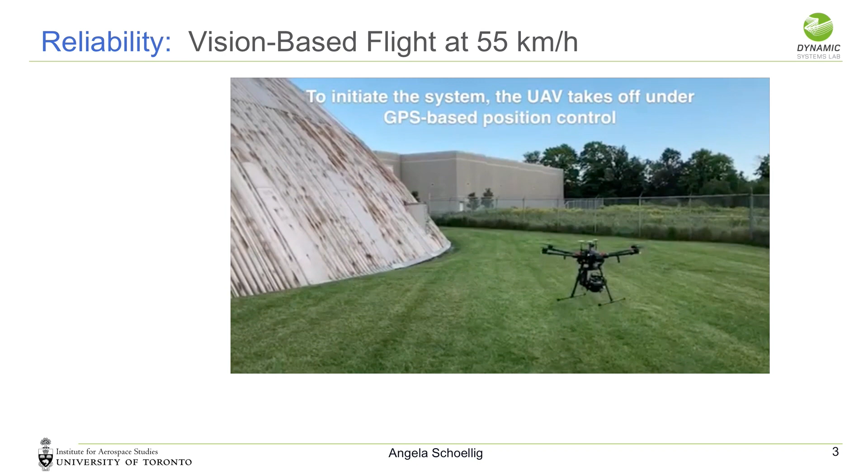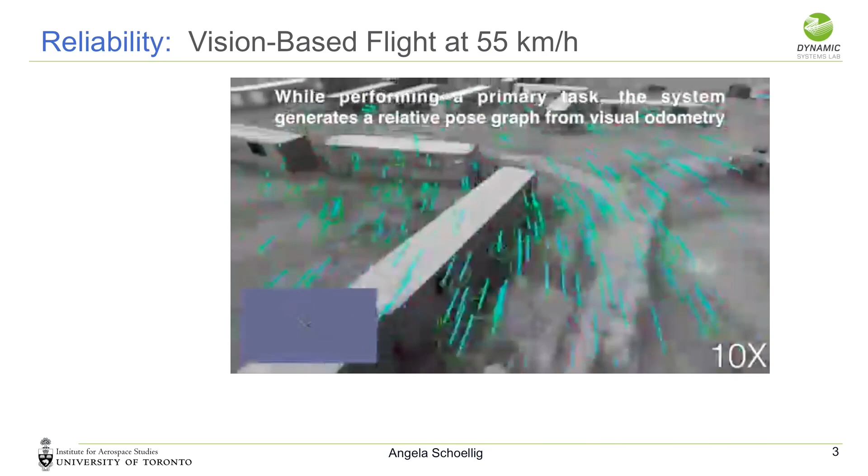We also care about reliability. This is a recent project where we use stereo vision as a backup for GPS. So we fly based on GPS, but when we lose GPS, we could use the images that the vehicle captured during flight to safely fly back based on vision alone. Here we fly up to 55 kilometers per hour, and we did tests even in downtown Montreal earlier in the summer.

So reliability is important in robotics. The same for safety. Here you see an off-road vehicle that we drive at our location. We do right now a long-term experiment where the robot needs to drive this route as fast as possible, in every season. In Toronto, as you can imagine, it's the same as here, we have lots of weather changes.

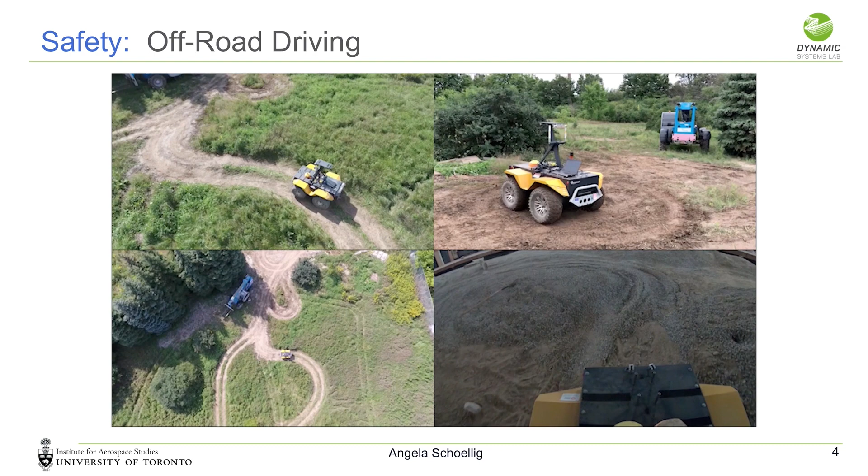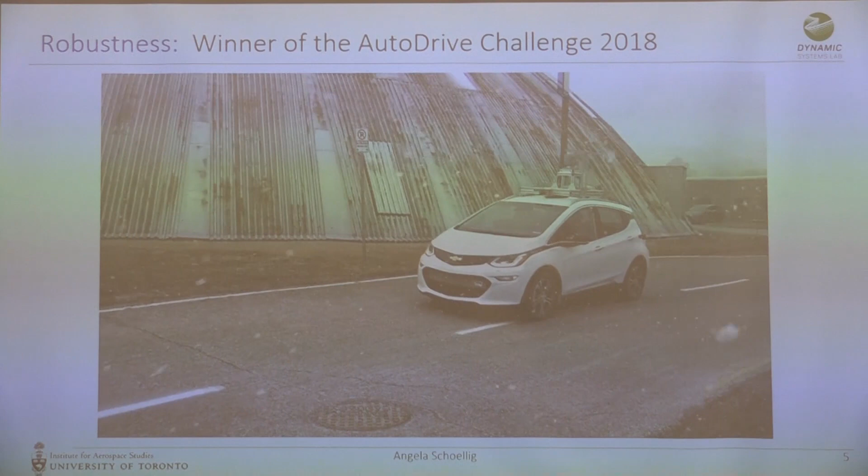We recently started a self-driving undergraduate team that competes in the General Motors AutoDrive challenge. It's over 3 years, inspired by some of the DARPA challenges. We had only 6 months to build the first prototype of this car, and we tested in winter conditions in Toronto, but the competition was in the desert in Arizona. So robustness, practical robustness is important, systems working in various conditions.

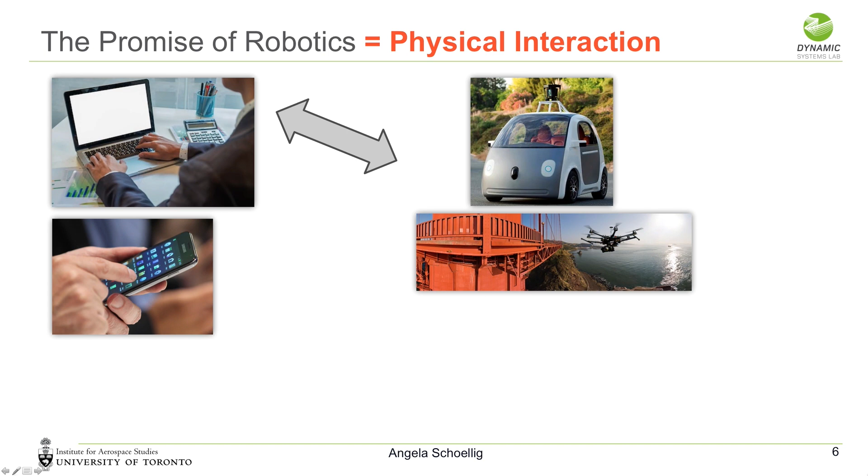That's kind of the setup of the lab. If you come to the lab, you could actually see those systems running. What is really interesting in robotics, compared to computers and smartphones that have clearly disrupted our work and personal life, is that robots promise physical interaction, and that can mean moving people and moving sensors in three-dimensional space, but it could also mean real physical interaction with a human during work tasks or helping humans in their daily tasks.

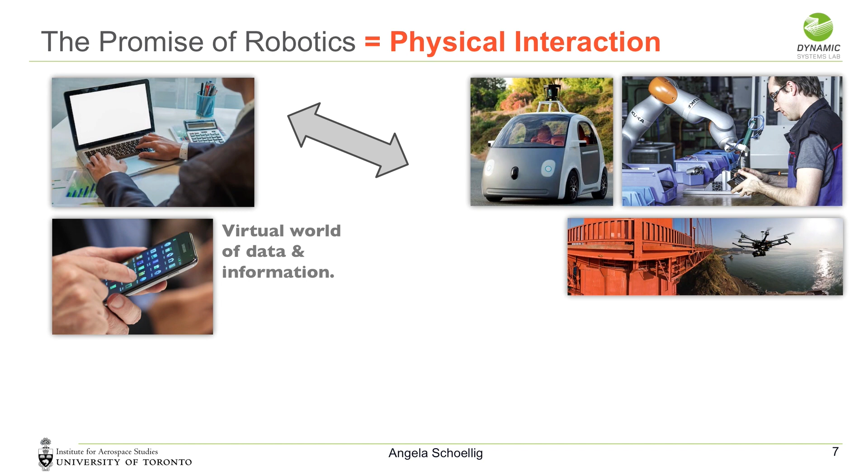But while computers and smartphones really operate in the virtual world of data and information, robots interact with the real world, and that makes the whole problem so much more difficult. It's really an exponentially increasing complexity.

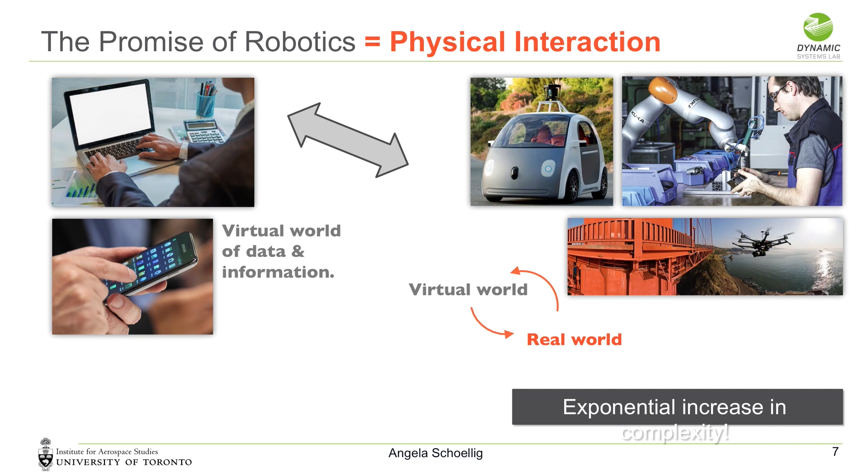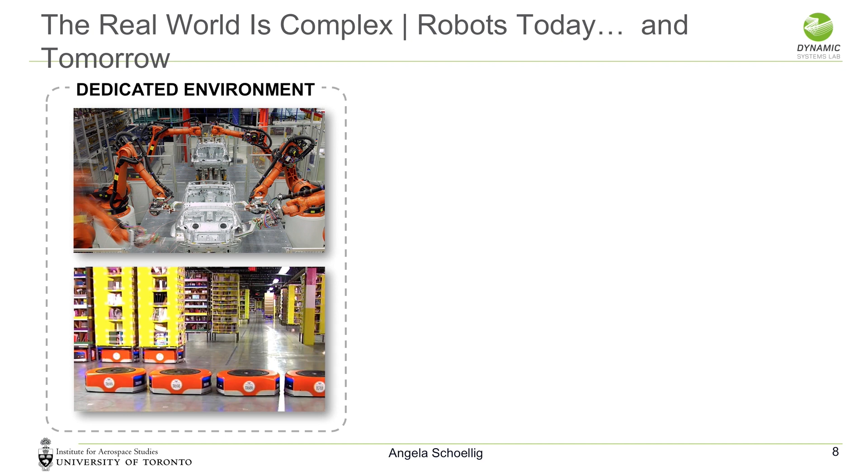How we have dealt with this in the past is that we built dedicated environments for robots where we reduced the complexity and where we could generate models that reflect the real world. However, the applications that I showed you that we aim to build as roboticists are aimed to work in human-centered environments where we have lots of prior uncertainty that is hard to model and describe.

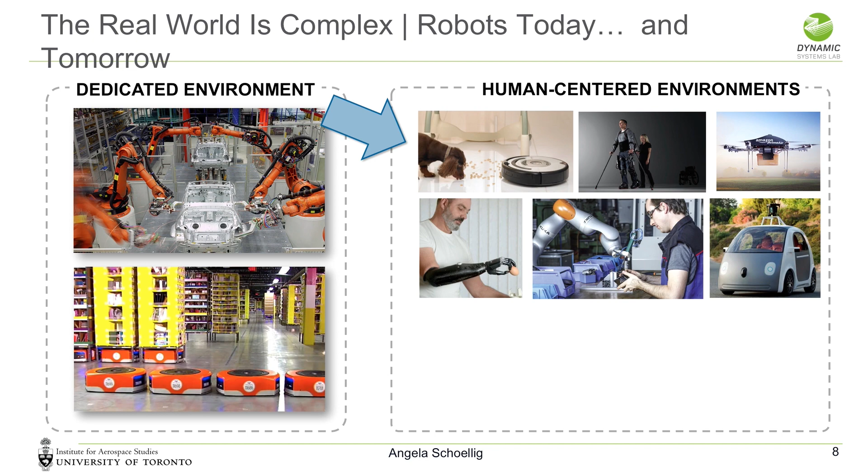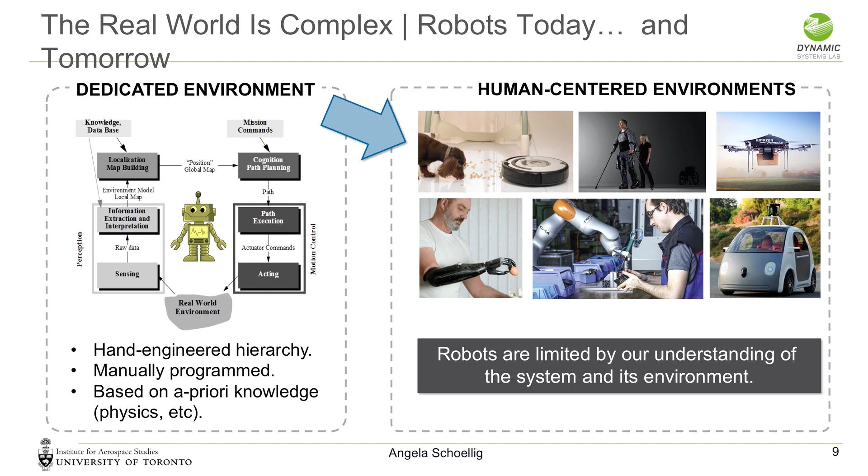So while in a dedicated environment, we can build these nice building blocks from perception to action, hand-engineered hierarchy, manually program the robot, and use a priori knowledge that's sufficiently correct to make the robot work and do the tasks, in human-centered environments, our understanding is limited, and that limits the performance of the robot.

To give you a fundamental question that describes this problem: how do we design robot algorithms that achieve safe, reliable, high-performance robot behavior in a priori unknown, unpredictable, and changing conditions?

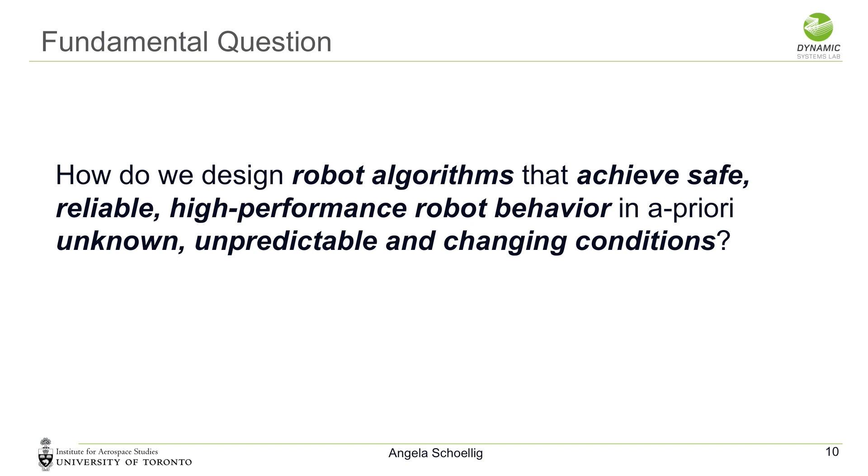One situation we encountered in Toronto: if we do off-road driving over a longer period of time, a robot experiences all these different road conditions. From light snow in January to freezing rain, then it got a little warmer, and we have sunny temperatures all the way to when the vegetation grows in May. That's a range of different conditions, which is challenging both for the vision side, but also for the control.

To make a robot operate in all these different conditions, one way to do that is called robust algorithms—designing an algorithm that works for all of these conditions. But as you can imagine, with the robot applications we have in mind, the range of conditions the robot has to work in is so large that robust algorithms ultimately turn into very conservative algorithms.

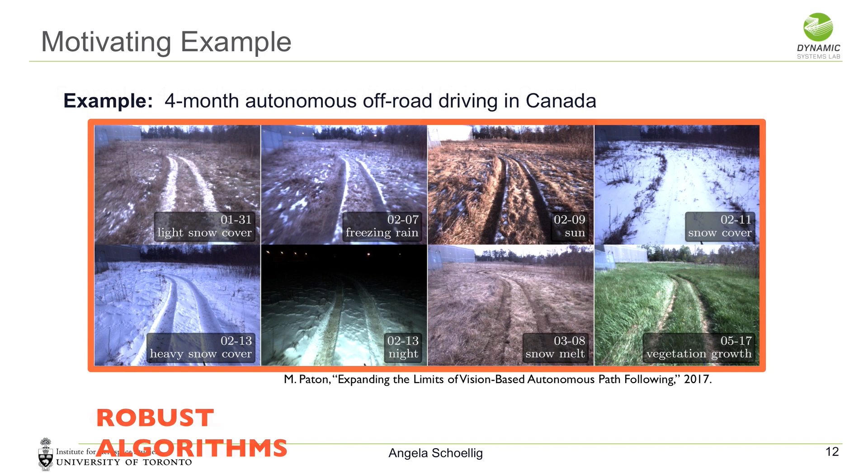So probably this robot would drive extremely slowly, because that's what it needs to do when we have heavy snow or ice. But in summer we could drive much better, in dry and sunny conditions. So a robust algorithm is never optimal for a single condition, and that's also called the robustness-performance trade-off.

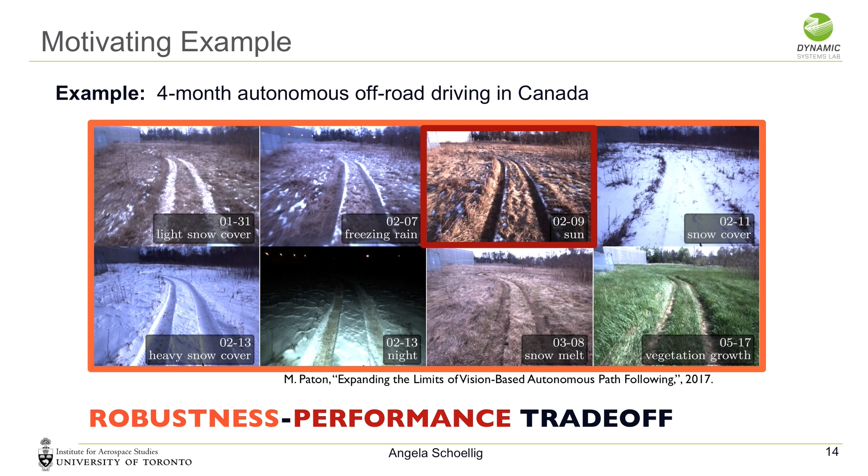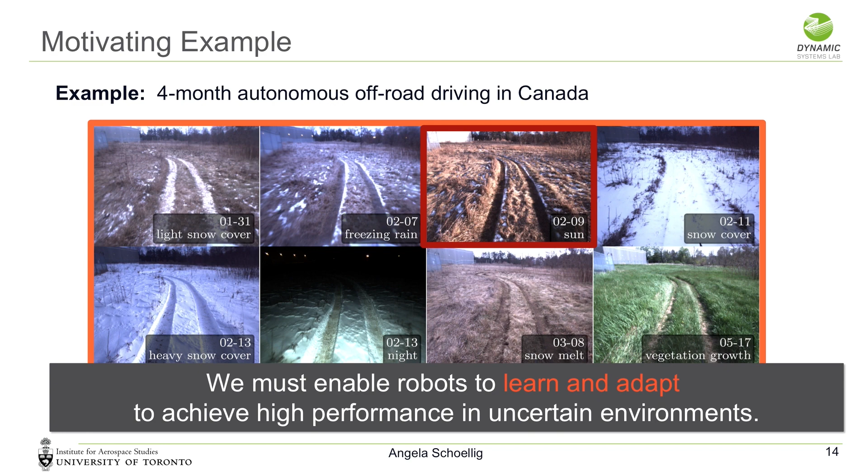To deal with that in practical applications, our belief is that we need to enable robots to learn and adapt to achieve high performance in those uncertain conditions.

So if you compare machine learning with robot learning—which is something I want to motivate—in general machine learning we look at feed-forward pipelines, versus in robotics we have dynamic systems and feedback loops. We have sensors that measure the environment, and then based on the actual sensor reading, we act.

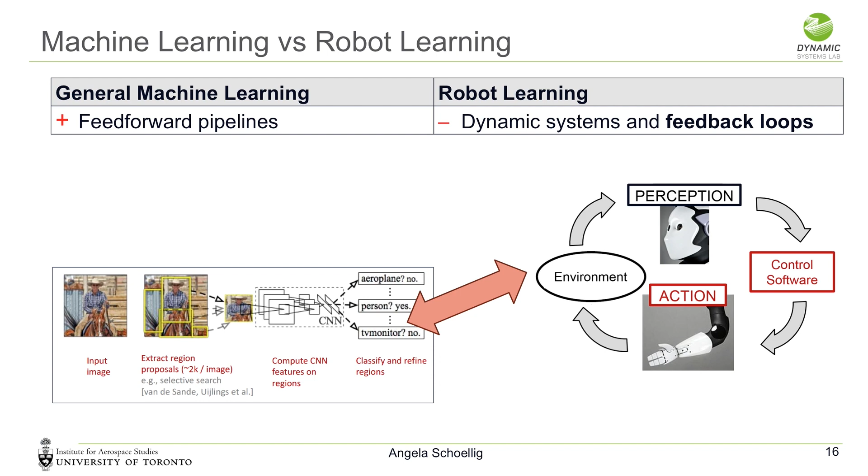The systems we look at in robotics perceive the environment, then decide what action to take next, and this action again influences what it sees in the next time step. So as actions influence the perception and vice versa, it is very difficult to have a complete data set a priori for these systems. That's very different from some of the standard machine learning problems like object detection.

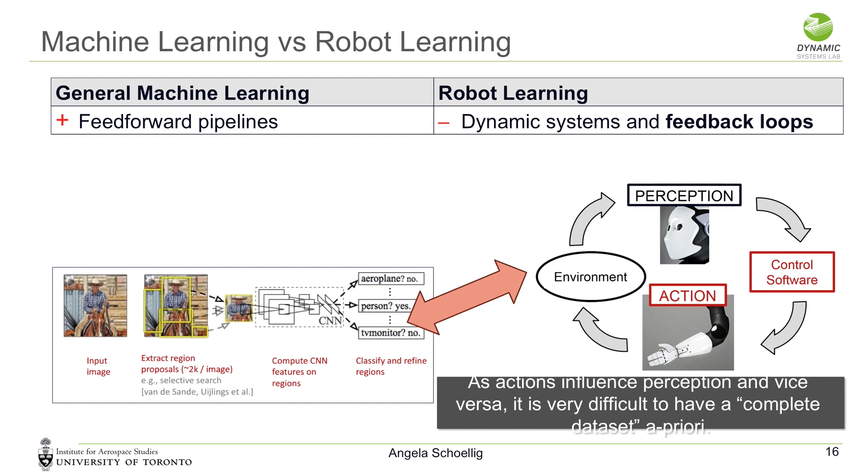But also even speech-to-text algorithms and things like that.

On the other hand, general machine learning is not safety critical. If I don't detect the right object in an image, that is not necessarily a big problem. If my phone doesn't understand me when I talk to it, I just try again—it's usually not safety critical.

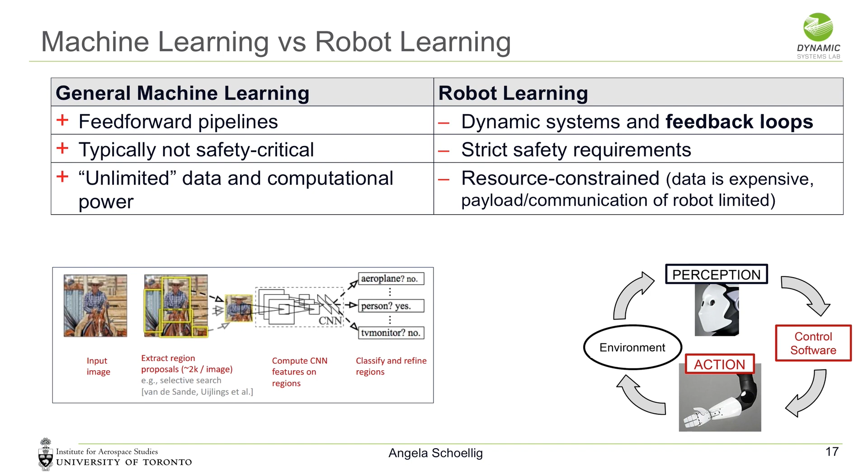But a robot doing the wrong actions could harm the environment and destroy the robot. On the other hand, we usually have unlimited data and computational power for these standard machine learning problems, but robots are resource constrained, and every time a robot moves in the real world, that costs money. It's expensive, and the payload and communication of the robot is limited.

But there are some other interesting features in robotics that make the problem interesting. We can influence the learning—we can do things like active learning. We can, on purpose, move the robot to a certain location to gather data. And we know something about the physical world: there are physics laws that we believe are correct, and we should be able to incorporate them into those algorithms.

And often there's more limited understanding of the underlying principles of some of the traditional problems that are solved with machine learning.

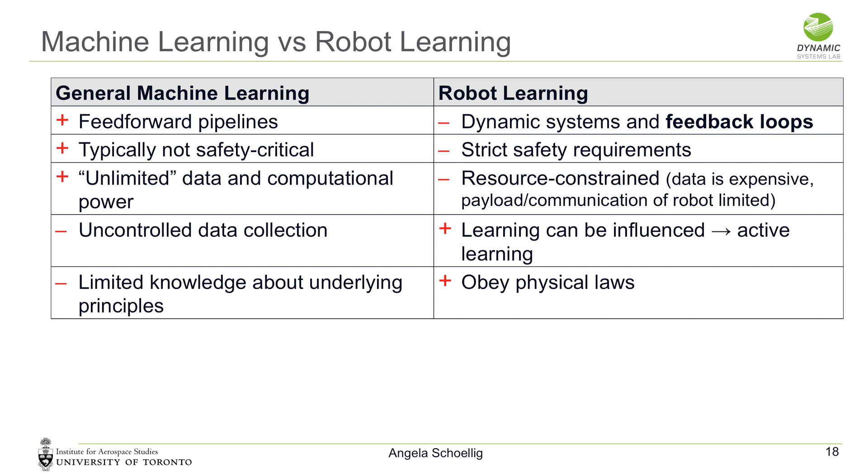So looking at all this together, there has been a lot of progress in robot learning. It's clear that people have shown that robots are able to learn new skills from experience.

The learning components are placed in the closed loop, which means the perception module is used to decide what the next action is, and this is done in the closed loop. But safety is usually ensured through an external safety backup system.

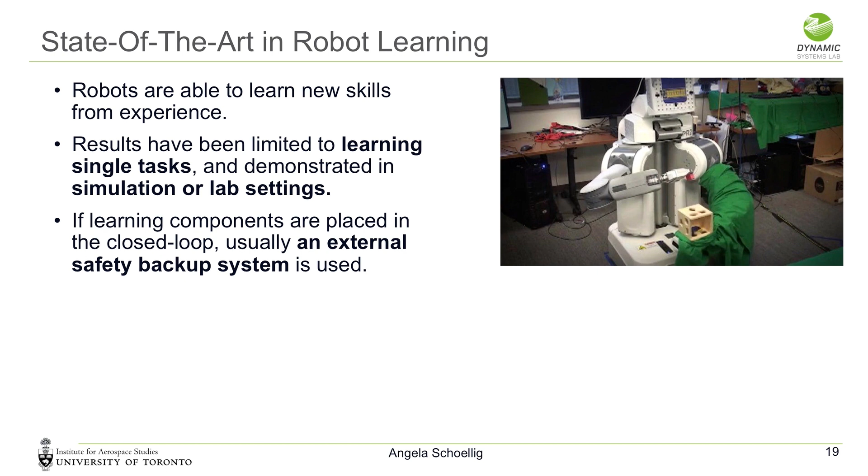A lot of the robot learning tasks that have been shown to be successful are in manipulation or using robot arms, where external safety mechanisms ensure the robot doesn't harm itself or the environment. The open question is how do we enable robot learning in realistic application scenarios outside of the lab? For that, we need data-efficient algorithms, something I call online learning algorithms. The robot needs to learn as it moves in the real world, because we assume we don't know the effects ahead of time that it is supposed to learn.

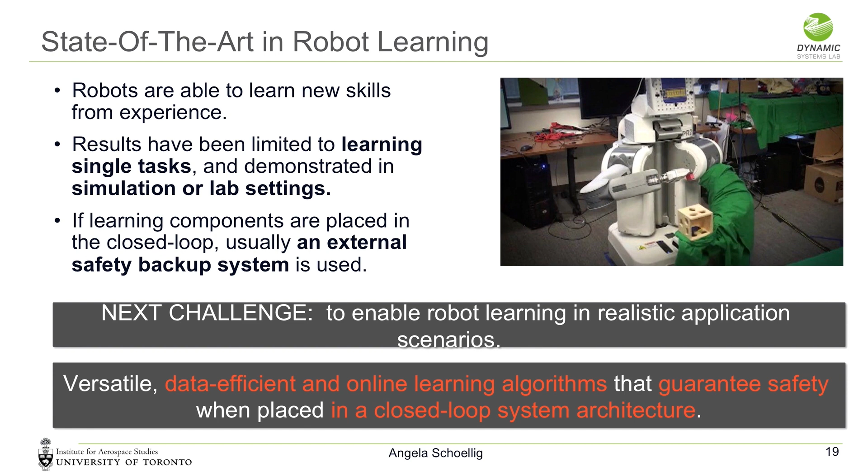For that, we need to guarantee safety. All of this means that as the robot moves in the real world, it's learning in a closed-loop system architecture, so it needs to perceive and then act, perceive and act. This closed-loop architecture could cause systems to be unstable or fail if not designed properly. So really the question is, how do we bring robot learning to applications and out of the lab setting?

Our approach in my lab has been to look at the combination of machine learning and control theory. That's the traditional approach to make machines do tasks on their own. For me, control theory is the science of feedback—it's the theory that describes feedback systems, where I have a perception-action loop that continuously runs on a system. Control theory has defined really important properties of feedback systems.

For example, stability, performance, and robustness. These concepts are defined in control theory and are extremely important for any machine operating in the real world.

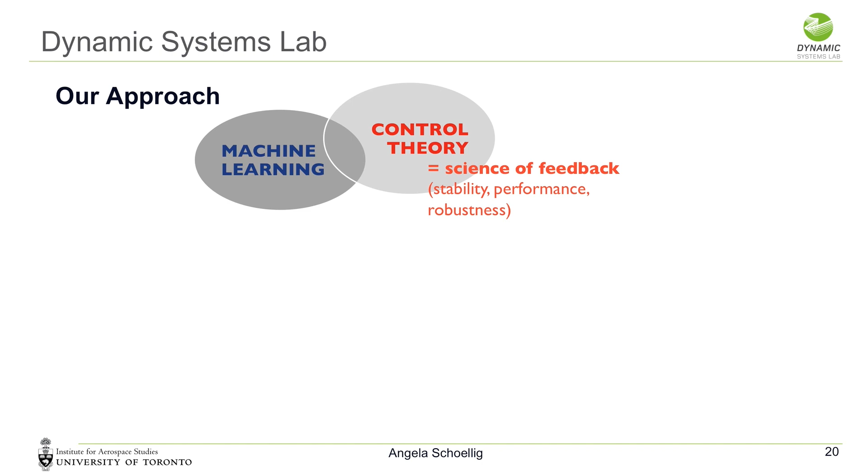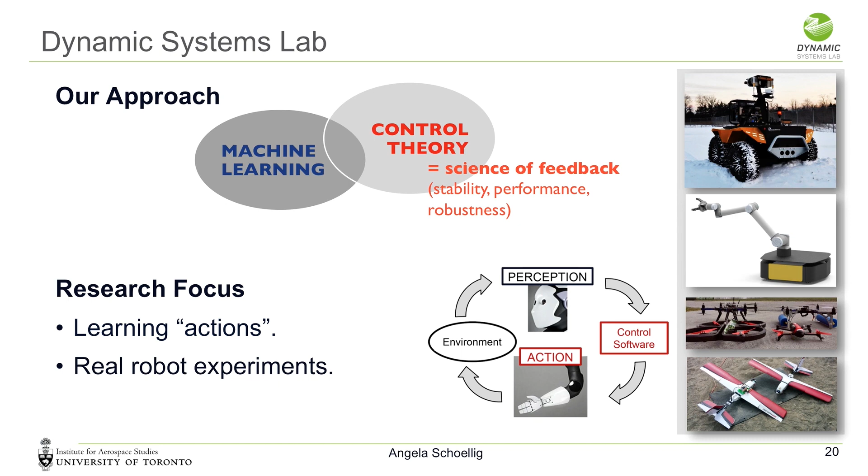So yeah, we have these action-perception loops. In my group, we focus right now mostly on learning the right actions, assuming the robot has perceived its environment and has a good understanding of its own state and the state of the environment—what are the next actions to take? We test on real robots, as I showed in the first videos. So let's see what we have been working on.

I structured the approaches that we have been doing in three parts: approaches where we leverage architecture and hierarchy, some work on safe learning, and then some more recent work on the combination of really fast adaptation and long-term learning.

We decide what actions to take over the next n time steps to achieve my task, and then we resolve this optimization problem. We know where the robot is at the start, we have a rough idea what the system dynamics are, and state and input constraints can be properly incorporated. This is a typical model predictive control framework—you can think of it as a general framework of feedback control. If all of this is known, this is model predictive control and it works really well.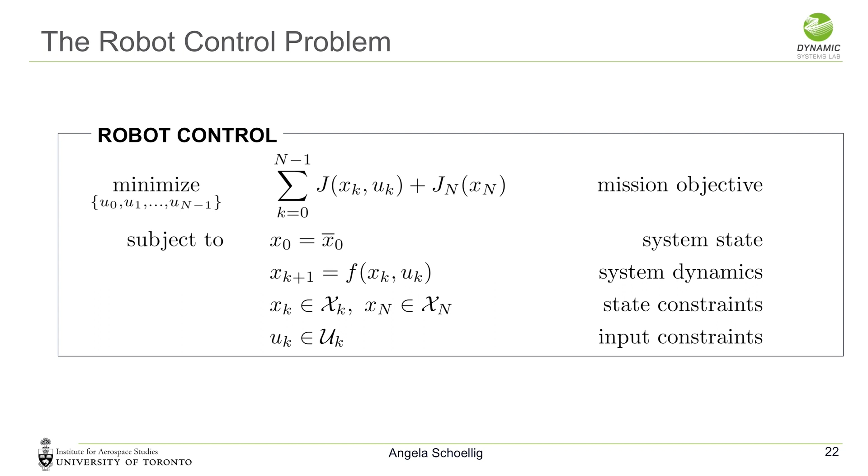But in the real world, all of these things can be unknown. I may know what the task of the robot is, but it may be difficult to formulate it in a functional form and write down these functions J. I may not know initially exactly where I am, and I may not know how the system performs in the environment—I cannot predict based on an action and a state what the next state will be.

The environment itself can be uncertain, so I may not know precisely where the obstacles are in the space, which could be encoded in state constraints. And if I have actuation failures, I may not understand exactly what actions I can actually perform with the robot. So all of this can be unknown, and then it's an incredibly hard problem.

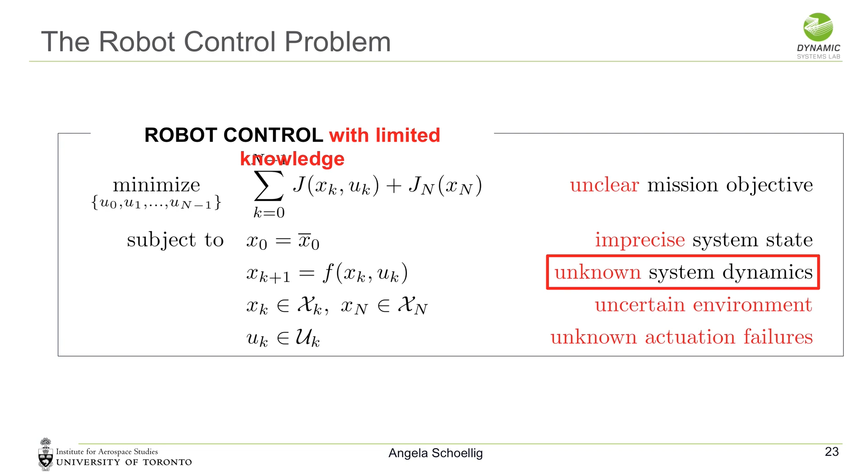My group has been focusing on the fact that we don't know exactly how the system performs in the real world—what are the dynamic equations that describe the robot's motion? If you think of the robot driving outdoors over a 4-month period, the unknown dynamics could be the slip and interaction between the wheel and the ground, which varies a lot depending on weather conditions. If the ground is frozen, the system reacts very differently than in muddy weather with lots of rain. So think of what we learn as the dynamics of the system.

And then we approach this problem in different ways. I just want to highlight how we combine ideas from control theory with machine learning, and where I think those two fields can complement each other.

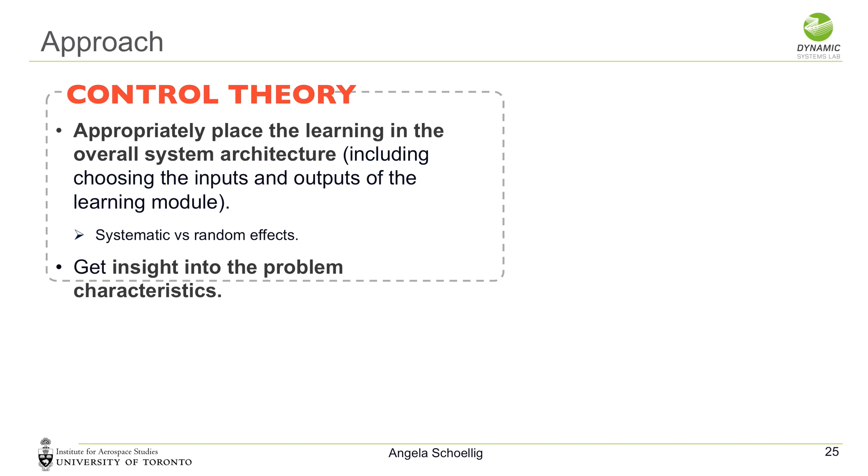If we look at architecture and hierarchy, control theory can help us appropriately place the learning in the overall system architecture. This includes choosing the right inputs and outputs of the learning module, deciding which part of the overall system is unknown and needs to be learned, and helping us distinguish systematic effects, which we can learn, from random effects.

Random effects are something you have to cope with differently, usually with fast feedback. Control theory can also give us overall insight into the problem characteristics.

One example is if you have a flying vehicle, a small quadrotor. A typical thing we do with control theory is have a cascaded loop of feedback controllers, where on the lowest level there's a motor controller that controls just the turn rate of the propeller. Then on a higher level, we close the loop to have the vehicle achieve a certain desired angle.

And then on an even higher level, we use GPS and have a desired position that the robot needs to reach, using a GPS measurement to control the vehicle to move to that position. So we have this cascaded series of control loops, and we have a good understanding of how the system works. Then we can include the learning at the appropriate position.

Machine learning is especially powerful if there are repeatable input-output patterns that we can actually learn. For example, at the lowest level there's so much randomness that if we tried to include machine learning right there, it would be really hard to learn.

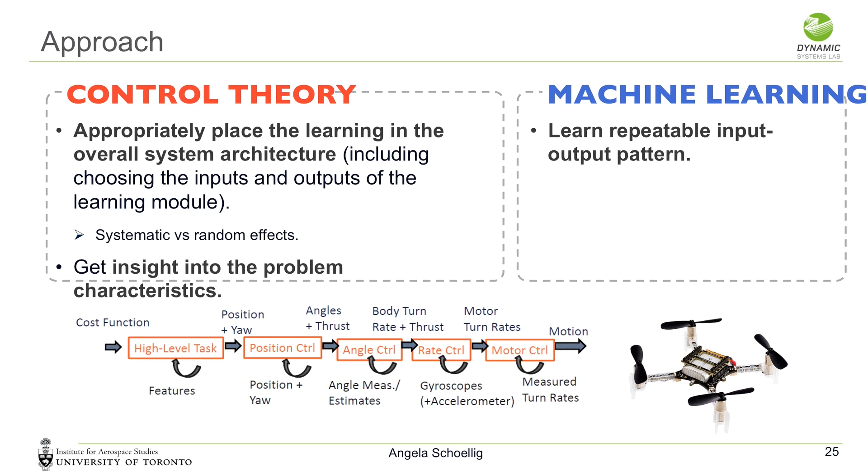But if we close several of these feedback loops at a higher level, and compare where the robot should be, the desired position, to where it actually is, the modeling errors that affect position following are often a very repeatable pattern we can observe. There, machine learning can be very effective with very little data.

So the interplay between control theory and machine learning here is that control theory can tell you where to place the learning, how to close the loops, and where you have systematic errors that you can then pretty easily learn with machine learning techniques. I'll show you two examples of that.

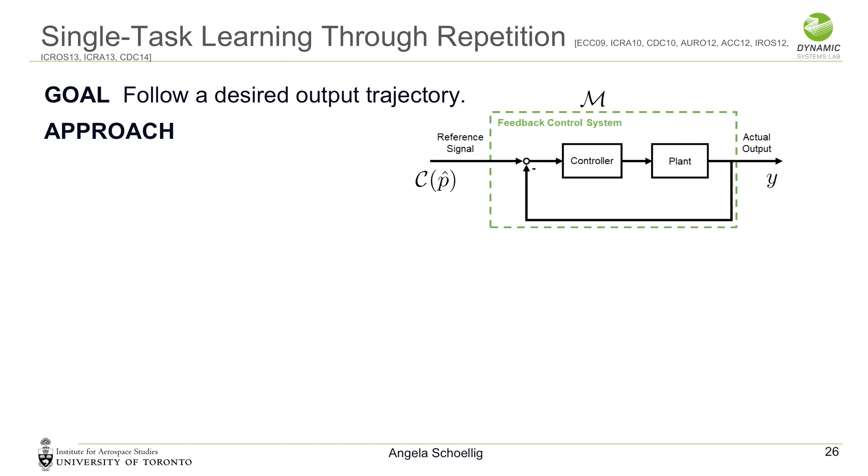One example was we wanted a flying vehicle to follow a desired trajectory, and we closed the feedback loop. We have a reference signal representing the desired trajectory the vehicle should fly, which in this case is a slalom trajectory, and then we see the actual output. This system, from input to output, is very repeatable, so when I send the same reference signal an hour later, I still get the same output, which is not perfectly tracking the desired reference trajectory.

So then we can put machine learning around it and do the following: we have a desired output behavior we want to achieve, an approximate model—in this case we assume we have roughly a model describing what's happening inside this dashed box—and we have a parameterized control strategy, which again comes from controls.

We have certain parameters that we choose to achieve the desired task, YD. We run the system based on our prior knowledge and assumptions of what the correct parameters should be, and see how well the system does—how close the true output is to the desired output. Then we use this approximate model to tell us how to update the parameters to get closer to our desired behavior, reducing this delta y. This is just an abstract formulation to give you an idea.

So you can imagine if you, for example, play basketball and you throw a ball and it's not going far enough, you have an intuitive understanding that next time you have to push harder. This approximate model tells us something similar. So if we see what we did wrong in the first trial, the approximate model tells us roughly what to change in our parameters to get better next time.

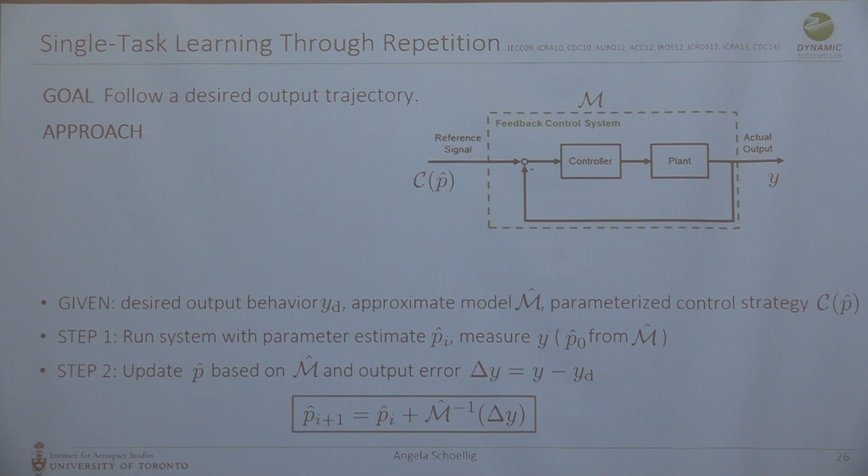And so here we use control theory in many different places. We use it to get this approximate model, to have an initial parameterized control strategy, and to close the inner loop such that we learn a repeated behavior. And then we can use that, for example, to learn a task that we couldn't do without learning.

So if we did it without learning, just based on our prior knowledge, we want to fly the slalom as quickly as possible, this is what happened.

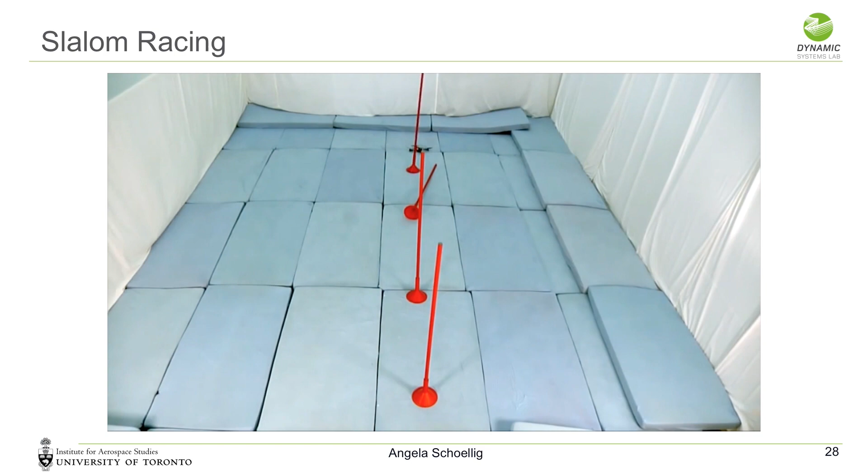But then we can start learning, and we learn here above the poles initially. You can imagine from every time you do this task, you get more information about how the system behaves. And then we adapt those parameters and improve over time. After only 3 iterations, a very little number of iterations, we can actually do that task.

And then we can learn different other configurations as well, like, for example, this forward flight. And we tested various configurations of those poles. You can always learn them within 3 or 4 iterations because we put in a lot of prior information.

So the lessons learned are we can modify this reference signal. And because of that, we don't jeopardize stability of the vehicle in the first place. As long as this reference signal is bounded, we have an underlying controller that makes sure the vehicle stays in the air. So the learning algorithm cannot crash the vehicle.

And because we use this gradient that was derived from this approximate model, the learning is extremely efficient because it tells us in which direction to correct the parameters to get better. And as long as the model is good enough to give us the right direction of correction, then this works extremely well.

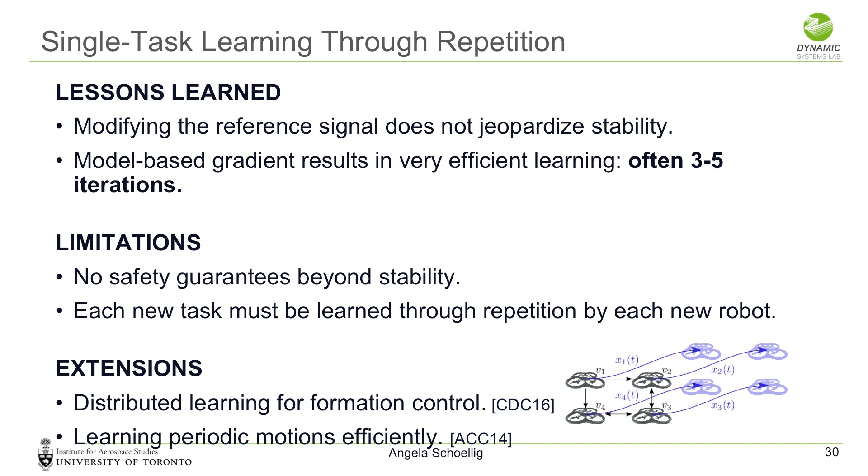The limitations of this are we don't have really formal safety guarantees beyond stability, because the formulation doesn't explicitly take into account state constraints. And each task needs to be learned again through repetition.

We had some extensions on this work to work for formations of robots and also for periodic motions, but being in a similar fashion as this one.

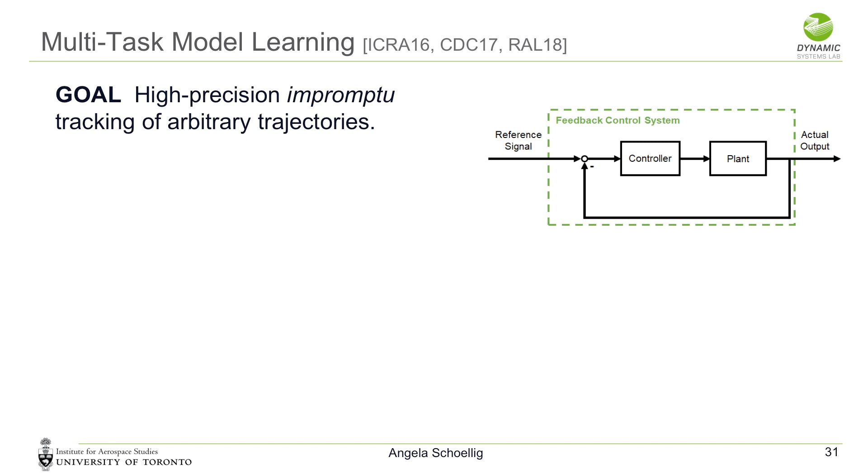So from that, our next goal was, can we learn a model a priori from data that then improves any trajectory? So we have, again, the same setup. And now we place this learning module in front of it, at the beginning of the loop, outside of the baseline feedback controller.

And the goal is that it learns an approximate inverse of this closed loop to have perfect tracking, so a desired output, a desired motion that I want to see of the robot, I see it perfectly done at the output. And from control theory, we actually know what this block should be.

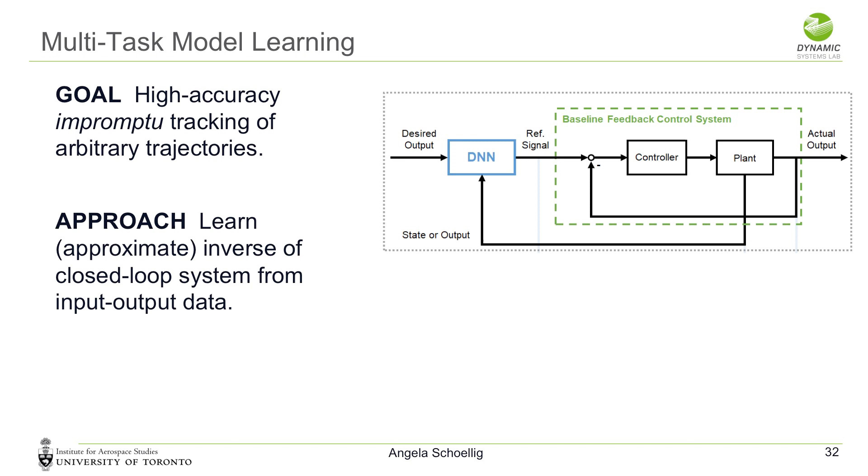So if we do a simple analysis and we assume we don't know this dash green box perfectly, otherwise we would be done. But if we assume it could be either represented by a linear system or a nonlinear system, then we know what this block ideally should be.

And those equations are written down here. They depend on two things: the state of the system, but also the desired trajectory a few steps ahead. So we need to know something about the future of the task, what we should do.

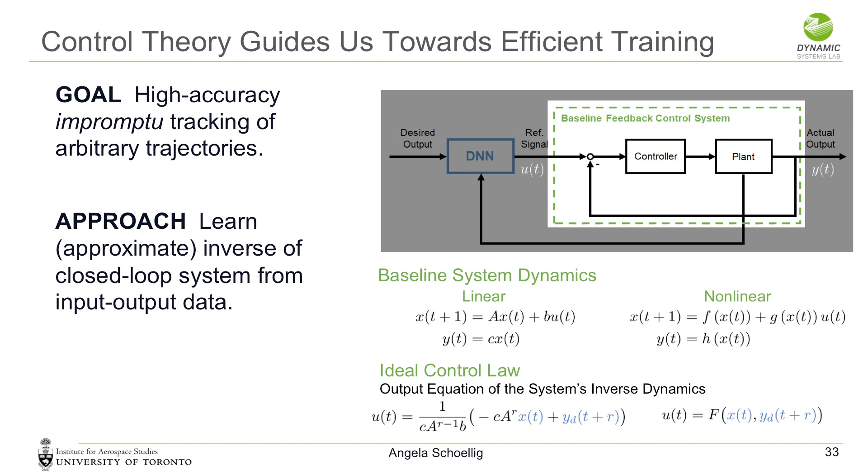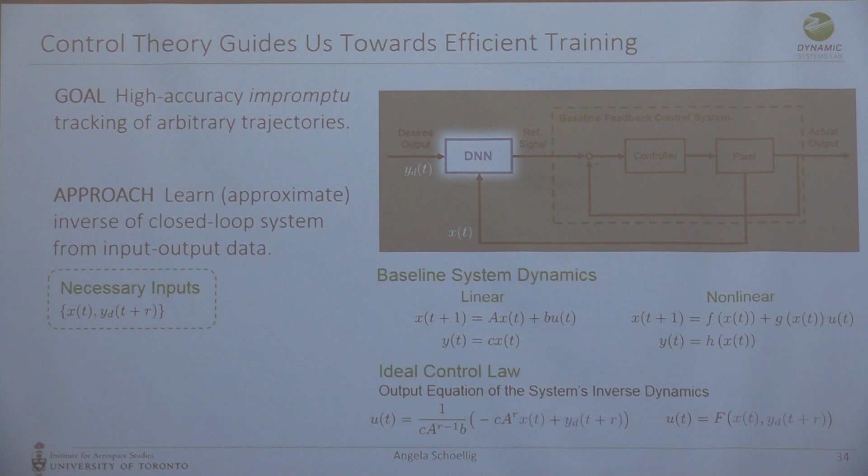So control theory here can help us to decide what should be those inputs to those blocks. What should be the input to this module that I want to learn? And R here is the relative degree, so it's the inherent delay of this underlying baseline system.

Detecting what R is for a given system is very easy. You can just do one experiment, what is called a step response. For control theory, people know that very well. So from a step response, you can basically detect R. And step response, for people who don't know it, means if I have a flying vehicle, I just tell it to go somewhere else immediately, and you see how long it takes to react.

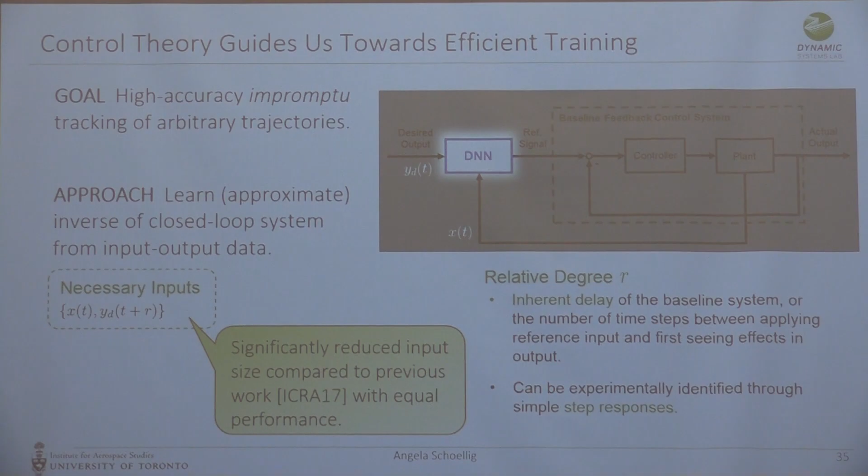So this simple experiment can help us to design the inputs to the block that we want to learn. Initially, we didn't do the math—we just tried it out, and we learned this nonlinear approximation function from data. After we did the math, we could reduce the number of necessary inputs. Here we use a deep neural network, but you could use any nonlinear regression technique, and reduce the number of inputs significantly without jeopardizing performance.

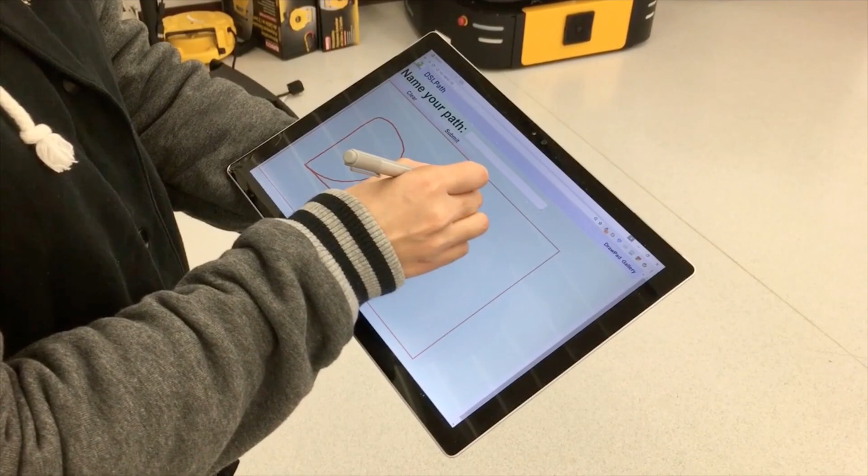The motivation and demonstration of this tool was: anyone can draw something on a tablet, and the vehicle should try to follow this. The red dashed line is the desired one, and what you just saw was a standard controller. Now you see how it improves if we just add this pre-block to the system. Usually we get an error reduction of 50% for every hand-drawn trajectory.

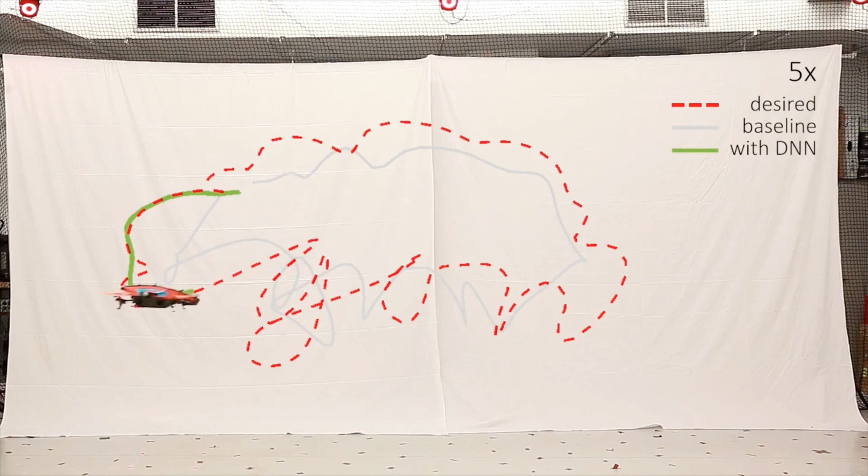We tested this in the lab, and many people came and actually drew trajectories. It consistently reduces the tracking error, and we continue to improve the system. We actually have some recent accepted work at the European Control Conference where we further improved those results. But the main takeaway is we can simply put an add-on block to any stable black box system.

So any black box controller that you buy—maybe a black box controller in your robotic arm that you don't even know what it is, someone else implemented it. You just get this robotic arm, you have some inputs you can send, and you can observe the resulting performance. But by adding this block, you can improve that black box system, and it's task independent.

We learn this pre-block once from a range of training data. For the results I showed you, it's periodic motions, but we're right now improving it by learning also from hand-drawn trajectories. Just by adding this block, very simple, you can improve your performance. So probably anyone working with black box control systems could make use of that. Control theory here has helped us to improve the data efficiency—we could reduce the number of inputs significantly from our initial work and still get equally good results.

We also extended this work in various directions. For example, we can also learn this block even though we know from theory this block would be unstable—it's inverse model learning for a non-minimum phase system. We can set up the system properly such that we learn a stable approximation of this unstable inverse.

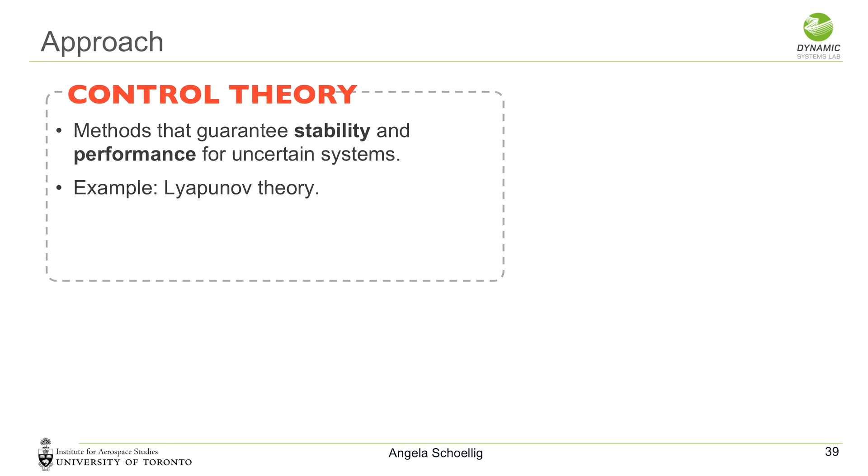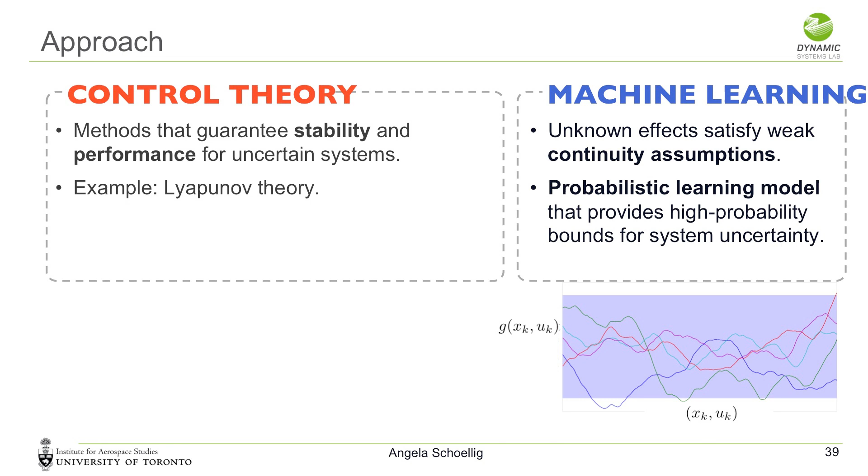Here, again, we combine ideas from control theory with ideas from machine learning. Control theory has provided definitions for stability and performance of uncertain systems—systems we don't know well—and has developed methods that guarantee stability and performance for those systems. One technique to prove stability of systems, including uncertain systems, is something called Lyapunov theory. So we leverage those tools from control theory, and then we use machine learning to learn those uncertain, unknown effects. With just making very weak continuity assumptions on the unknown effect itself, and using probabilistic learning models, we can provide a stochastic model of the uncertainty that can then be used in standard control theory.

To give you an example, what motivated us to do this work is we drive this off-road robot through the terrain, through narrow fence openings, through dense vegetation, close to buildings and infrastructure. And we want the robot to improve its driving speed over time, while never getting off the path too much and jeopardizing safety. So how can we provide these high probability safety guarantees?

That's the best we can do. We cannot give 100% safety guarantees. We can give safety guarantees with high probability during the learning phase.

The approach is using a probabilistic learning model that represents our current knowledge and belief of the unknown effects. The usual approach we take is we combine our a priori model for the ground vehicle, which could be a unicycle model, a simple kinematic or dynamic model of the system, with an additional component that we just add to it that is learned. So if G is 0, we are all in our old domain, we know what's going on, and we can use standard methods. But if we have some unknown component, some friction component that's unknown, we want to learn that.

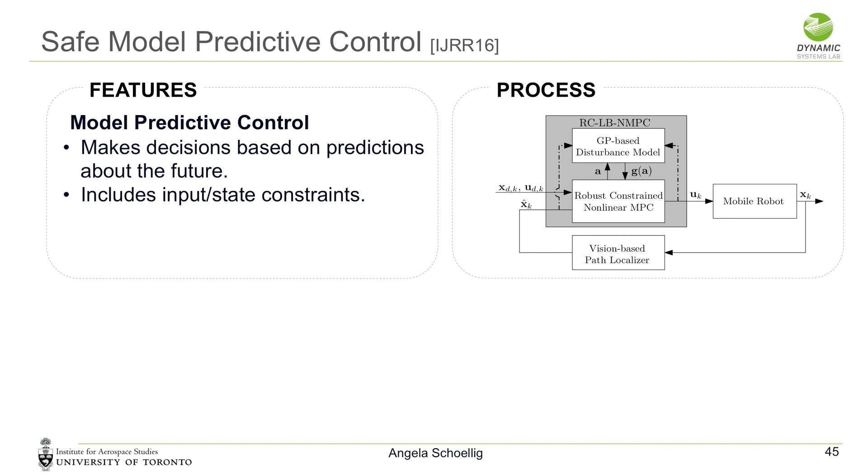Model predictive control makes decisions based on predictions about the future, and now we can use our learned model to make predictions. But since we don't have perfect knowledge of the learned model, the predictions are still uncertain, and we don't know perfectly where we end up. Model predictive control has the other nice feature that we can include input and state constraints.

Here is a practical description of what is happening. At a certain position, the robot looks into the future and tries to optimize its actions over the next period of time, for example, a prediction horizon of 10 seconds. And now we have this learned model.

Going back, we don't perfectly know how the robot behaves, but we know it behaves somewhere within this blue shaded area. Since we don't know exactly what the robot does, for a given fixed input sequence, the robot could possibly end up anywhere in this shaded red area with high probability. That may mean that over this horizon, it violates the path constraints.

Given that we want to enforce input and state constraints, the algorithm would reduce the speed, so it wouldn't get as far over the prediction horizon, but we would make sure the robot stays within the fixed path bounds. What's implicitly encoded is that at slower speeds our models are more accurate, and we can make sure that with high probability we stay within these path bounds.

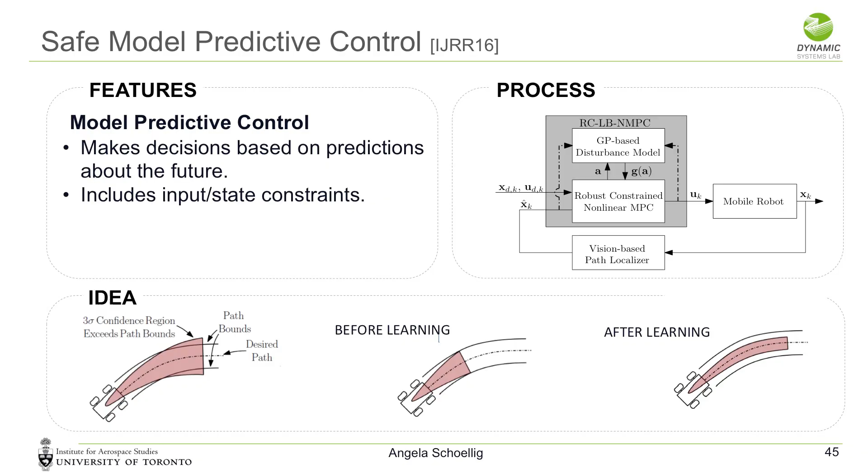This approach is very generic. It basically combines a stochastic modeling approach with robust model predictive control. And if we apply it to a robot...

Can you tell us how you're rolling out the uncertainty distributions?

What you would need, even if you know perfectly where you are at the current moment, is a model that is stochastic. So even if you apply one input, you don't know exactly where you end up next. There could be a variation.

So we use a sigma point transformation. We basically approximate it as a Gaussian, and that runs fast enough. It's a good approximation for our system, as we've tested in experiments.

Here you see side by side driving on an off-road trip. On the left, the robot drives this path the first time, and on the right when it drives it the third time. You see it can significantly increase the speed, and the uncertainty envelope is smaller. Especially on straight paths, the system learns very quickly and as a result can drive much faster.

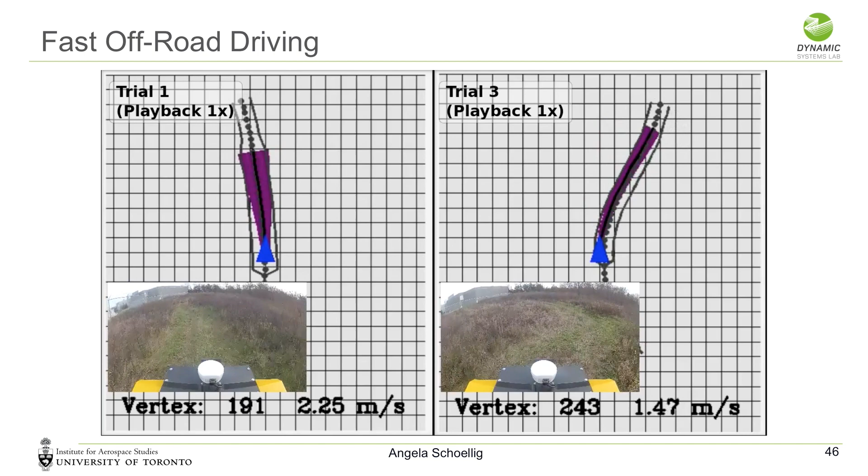I hope you can see it. We did significant tests with this. This is off-road, just outside of our building, and the particular section of the path is finished much faster once you have done it a couple of times.

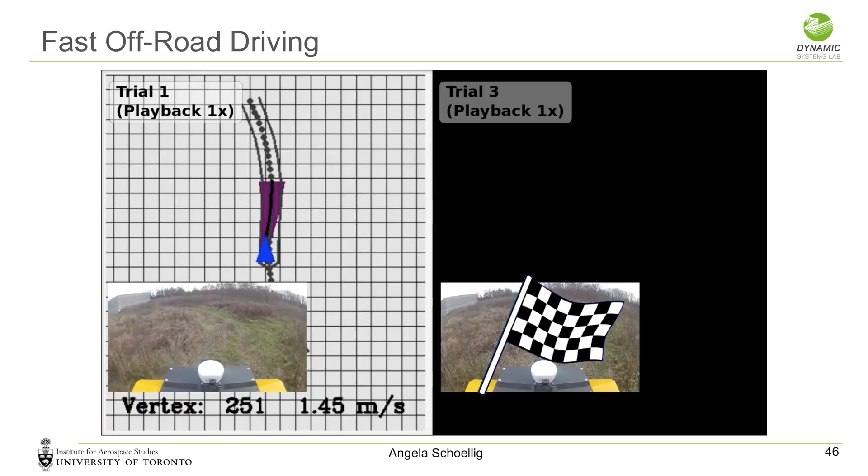Intuitively, it's like if you drive in a city the first time, you're probably driving very carefully. But as you do it multiple times, you gather experience, you know the way the road goes, and you can drive much more confidently. That's basically what is happening here.

We did significant tests of this because we had industrial partners. We tested this on a planetary rover of the Canadian Space Agency in a planetary mock-up setup in Montreal, and also on a vehicle from the Defense Research and Development Canada. Again, very different vehicles—the only thing we really modified were some hyperparameters of the Gaussian process, very mildly, and in every situation the vehicle could learn from the data it gathers.

So this provides high probability safety guarantees. In practice, it meant we could drive this vehicle off-road faster than we would ever feel comfortable otherwise. It would also naturally slow down in turns, because that's where our vision system doesn't work as well—it would give a larger uncertainty, and so naturally would slow down.

And so here, it optimizes it safely, and under the assumptions that we make, we find the safe global optimum. So it tries it several iterations, and eventually it finds the safe global optimum and gets a controller that is optimized for a given task. So this was a simple illustration. It also relies on Gaussian processes and the model-free approach to directly learn this mapping between controller parameters and performance.

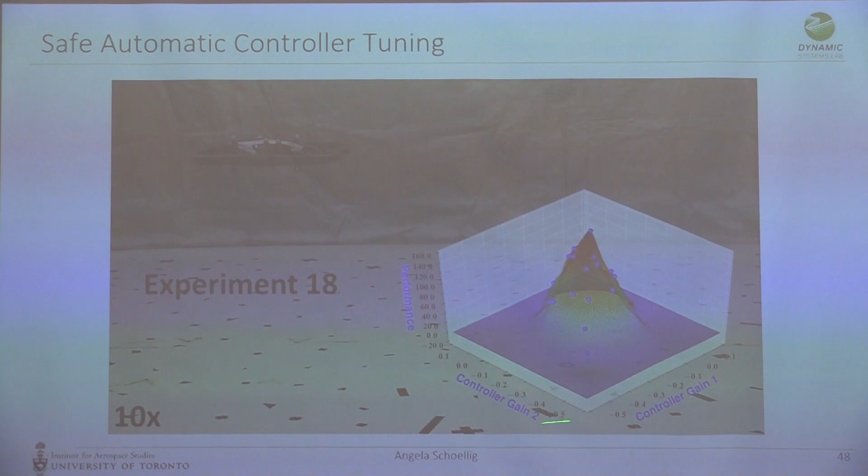So overall, the safe approach, yeah. Can you tell us how you're getting this high probability correctness, given that you have a Gaussian approximation? I understand that you bound the GP approximation, but if you're rolling out with just a Gaussian approximation, that seems hard to balance.

So for the model predictive part, yeah, there it's harder. Without some additional assumptions, it's hard to do any proofs. So it's kind of inspired by our formal analysis, that's our safe model-based reinforcement learning paper, but then it's the practical implementation of it. So it's hard to prove really formally what's happening if you assume nonlinear systems, Gaussian processes, and so on. We don't have a full proof of exactly the setup that we have in the experiments, only of a simplified version. For the automatic tuning, we do have that, yeah.

So these are some first approaches towards safe learning, but the idea is don't try random actions and learn about the behavior of the system in the real world, but try actions that guarantee you a certain amount of safety, which could either be what control theorists would call stability. So I just want to guarantee the vehicle doesn't crash, or that I really stay within the path bounds or within some other state constraints.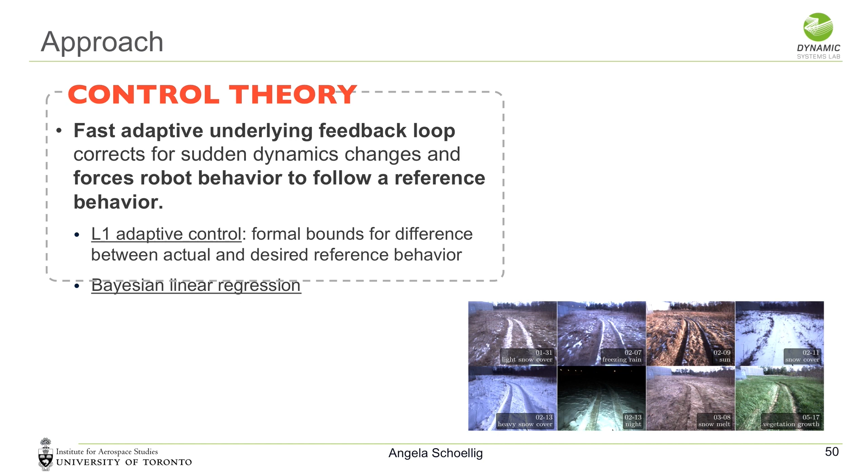But then there's also the long-term learning. So if I see snowy roads again, I'd like to learn from last year's winter and use those results. And so we have done some first approaches in this direction, where we use very fast adaptive underlying feedback to very quickly correct for those unknown, unexpected conditions. Two approaches we have been exploring are using L1 adaptive control or really fast Bayesian linear regression, and then in the long term, use that data to collect experience. Again, this is probably something we humans do as well. We very quickly react if something sudden happens, but then we also long term get better at driving or get better at a certain task.

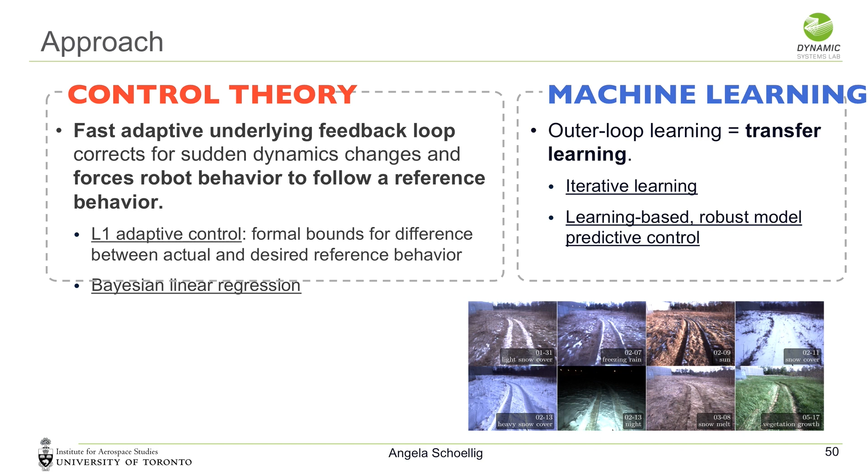And I just want to give you a glimpse into two different ways. One is where we use an underlying L1 adaptive controller, an adaptive controller that very quickly corrects for model errors and tries to make systems behave like a reference model. And so we use that underlying adaptive controller with a high-level iterative learning approach, similar to what you saw in the Slalom Learning. And what you see here is we look at either a standard underlying controller, a PD or PID controller, or this L1 adaptive control approach.

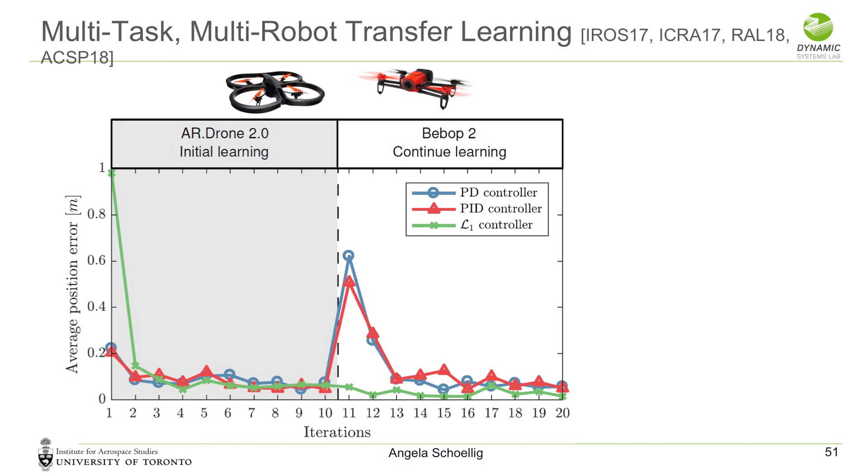So we learn a certain task, think of it as the slalom, and then over iterations we get better. But then we suddenly switch to a different vehicle, which is a sudden change in dynamics, and that usually would mean that I need to relearn this task on this different dynamic system. But if I have this underlying L1 adaptive controller that compensates for these dynamic changes very quickly, I can actually reuse the knowledge that I collected with this other vehicle.

So L1 adaptive control, or any other adaptive control, can help to quickly compensate for dynamic differences, and then we can, on top, do some high-level learning. This kind of architecture allows us to even transition knowledge between different systems.

Another approach - we have a very recent paper that we are presenting at ICRA, so if you're coming to ICRA, we basically do fast adaptation with Bayesian linear regression and then some long-term learning on top of that.

So to summarize, there is an interesting kind of connection between machine learning and control theory, where control theory is really the science that allowed us to understand these type of feedback systems, and it allows us to do online and data-efficient learning on real robots with high probability safety guarantees in some respect.

The disadvantage is we put in some additional structure. The architectures that I showed you are human designed, so we don't know, is there a better way even for systems to learn? But overall, the structure that we put in can allow us to learn very efficiently on real robots without making very strong assumptions about the unknown effects themselves.

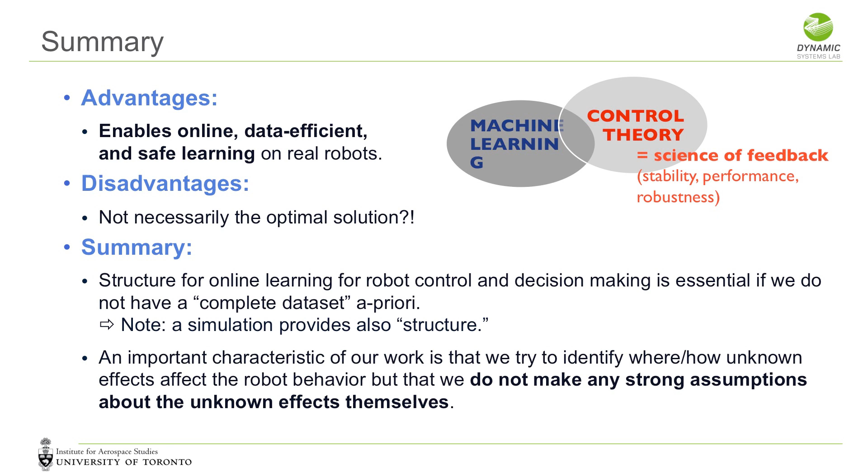So whenever we did this approach, we kind of fall back to methods that don't make strong assumptions about the things we don't know. For example, we use Gaussian processes, a very, very generic stochastic modeling approach.

We eventually work with quite a lot of different collaborators to apply this technology in different fields. And in the long term, it's just something I'd like to kind of put out there for all of you.

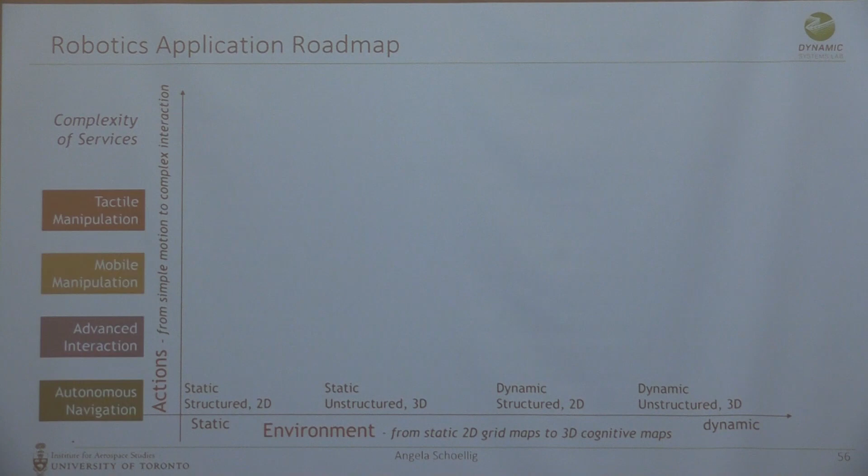I think in robotics, we, on the one hand, have to deal with increasingly more challenging environments, from static environments like a factory floor to much more dynamic environments, as well as we want robots to do increasingly more complex tasks. And then, you could map the different applications that you can envision robots to do on that kind of grid. For example, the universal household robot would be very challenging.

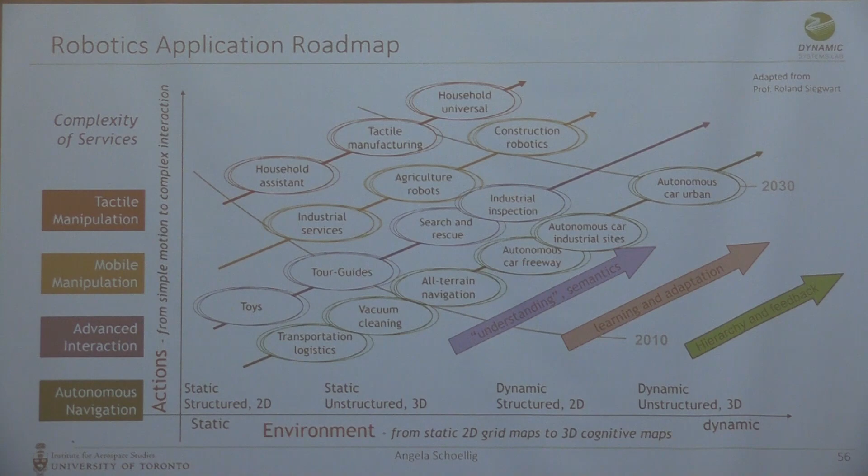It's a complex task that it needs to do, but also very challenging in dynamic environments. And I think to get there, we need learning and adaptation. We probably need advances in many different other fields, including sensing and actuation. But we don't get there without prior knowledge.

And so I tried to plot the results that we have been doing in this kind of coordinate frame. And we have - whenever you have sufficient information, that's the easiest. That's where most of our real applications lie.

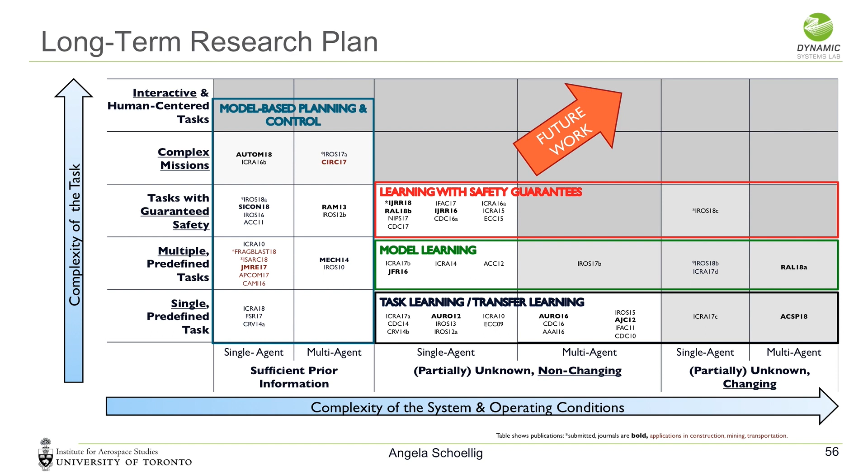But then dealing with increasingly more dynamic environments or more interactive and human-centered complex tasks is really challenging. But I think it's needed to eventually get to the point where we have a seamless interaction between robotic systems and the physical world. And I think there's lots of open questions, but we try to show that there is some hope that we can have safe adaptation of robots in the real world. Thanks.

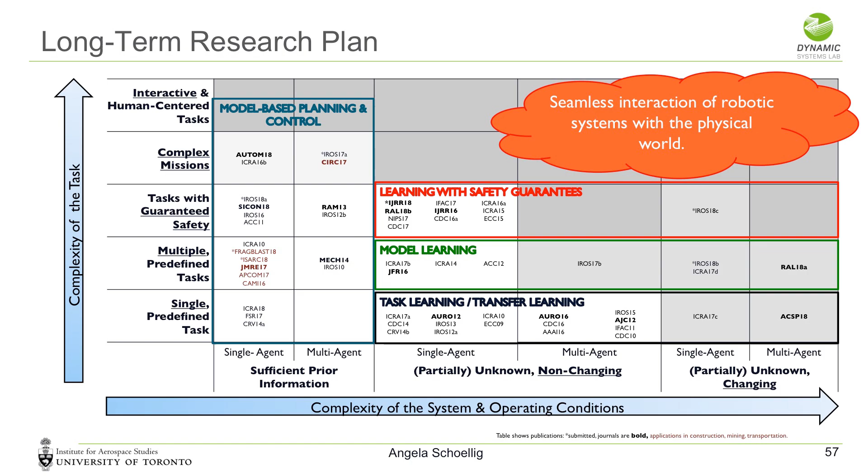So thanks for the talk. I guess my question was, how would we apply this in a manipulation context? I sort of see two big challenges. One is X_T is not something that's known, especially when you're interacting with objects, especially if it's a novel object - what is the state? Second, I think GP models are challenging here because if I just think about a contact dynamic, it's super discontinuous right at the contact boundary.

So do you have any thoughts on how to address those two challenges? Yeah, overall, yes, we try to make first steps in this direction of safe online data-efficient learning. Discontinuities cannot be captured by the Gaussian process ideas that we had. Some of the other iterative learning techniques could possibly do that, but it's still, I think, a very open and challenging, interesting problem.

I think we just did, from the model-based techniques, a little step towards something else, but there are so many open questions if you talk about interactions. Yeah.

Thank you for a fascinating talk. The last part, machines changed from one type of machine to the next machine, but the L1 conveyed most of the stuff to the next one, so very quick convergence. I'm just wondering, what the specific physical part of the model is conveyed?

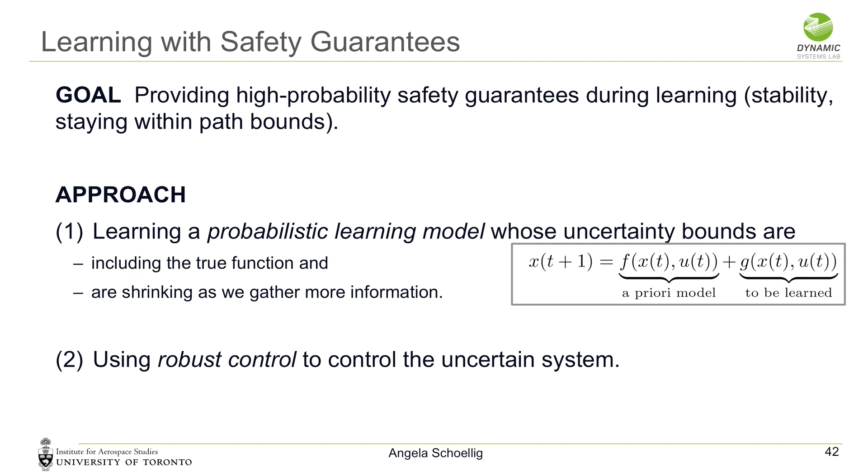So I understand why you're adding the error linearly to the dynamic equation, but in the real world there are a lot of cases where your signal comes too fast or too slow, for both control and observations. So I'm wondering, have you ever tried any experiment or have any insight into adding those noise terms directly to the x_t and u_t, instead of putting it outside?

Yeah, so adding this in an additive way is an approximation. What I should say is that we have explored that G does not only depend on x and u, but other variables or a history of those variables. So we explored that, but we always kept it as an additive term, I think more for simplicity, and because we didn't see a strong case to do it differently. But that's again a way, if you have a good understanding of your system and you know where those uncertainties enter, then you can adapt this equation and probably get more data-efficient learning. The more understanding you have of where the uncertainty is, the less data you would need. But we haven't tried that, yeah.

Yeah, I'm sorry for being late. Okay, thank you. So within your safe model predictive control, do you have any step where your control actions lead to gathering more data from the system, other than just robust control? For example, in your adaptive control, it reminds me of persistent excitation, that you need to make decisions that lead to more data from the system to do it better.